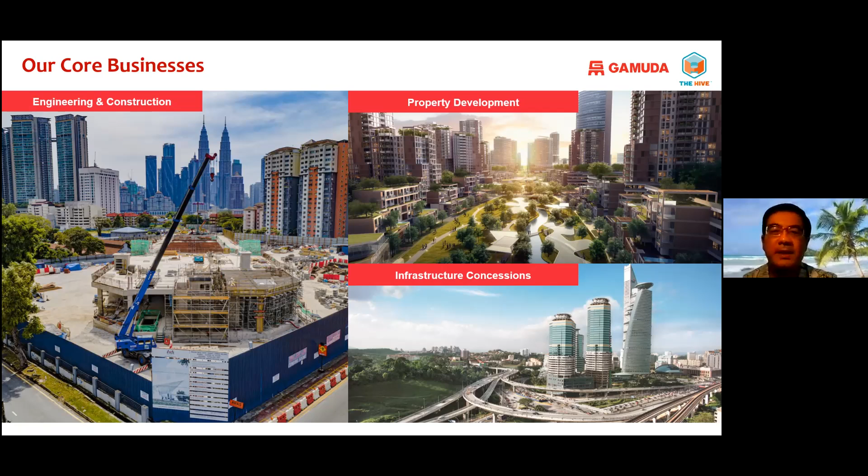Right, so this is how we all got started. If you're interested, I think Discovery Channel made a full feature-length documentary on this very piece of infrastructure. It's still the only one in the world. It's called the SMART Tunnel, S-M-A-R-T. What it stands for is Stormwater Management and Road Tunnel. So the acronym is SMART.

What it does is, Kuala Lumpur basically sits in a valley, and we have a tremendous amount of thunderstorms throughout the year, being an equatorial country. So we were very prone to flooding. In fact, the word Kuala Lumpur means muddy river bank in Malay, and those river banks would just burst, and the rainwater into the two rivers that make up Kuala Lumpur, or at least the heart of Kuala Lumpur, would overflow, and it'll be quite terrible actually. So Gamuda gave a solution, which is to build a tunnel, obviously, to take all that water out, millions of gallons of water.

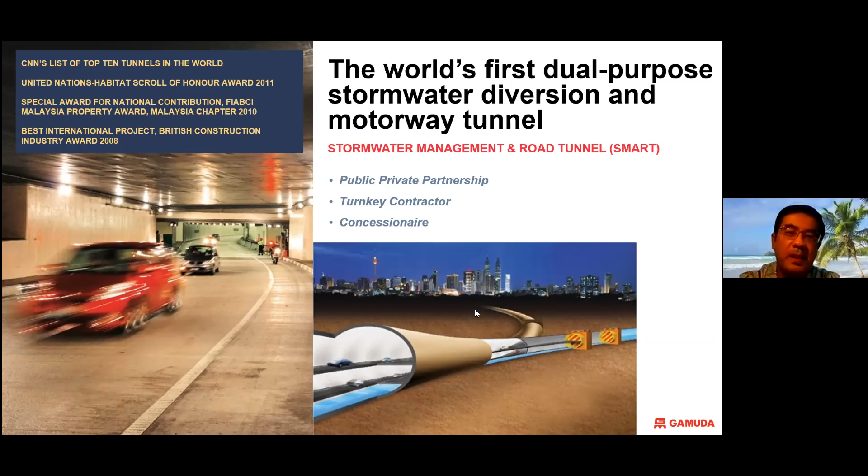It remains the one and only stormwater diversion tunnel in the world. If anywhere in the States has this problem, Ravi, let us know—obviously we can provide the solution.

So it has several modes. Mode 1 is when it's dry. Mode 4 is the worst thunderstorm, when the whole tunnel is taken up. Mode 2 is quite light, cars can still go through it. Mode 3 gets a bit heavier, so for safety reasons we shut the tunnel.

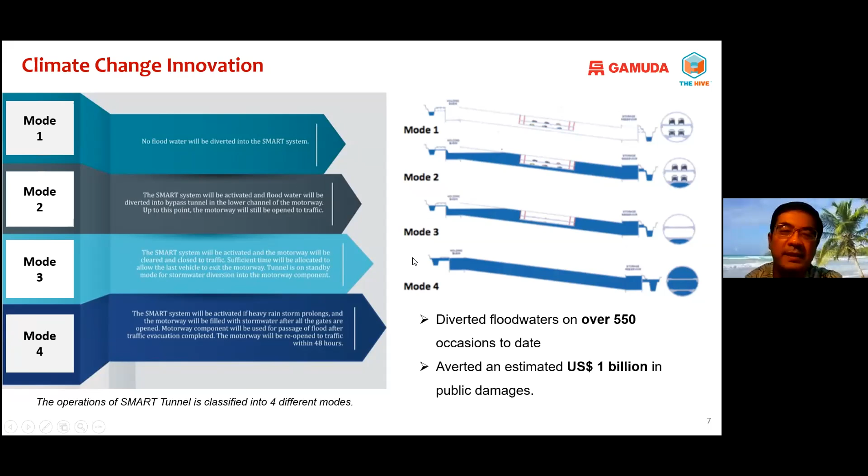Not a single car has been stuck in the water in the tunnel itself. They are pretty sophisticated systems to ensure that doesn't happen. So this is the operation of that tunnel.

As I mentioned earlier, we are looking at a job, and in fact we've already clinched it in Taiwan. Here we're building about just under 4 kilometers of a 43-kilometer public transport rail line, constructing two parallel underground tunnels and two underground stations as well. The key complication in Taiwan is the soil conditions as well as earthquakes, which is a key concern there.

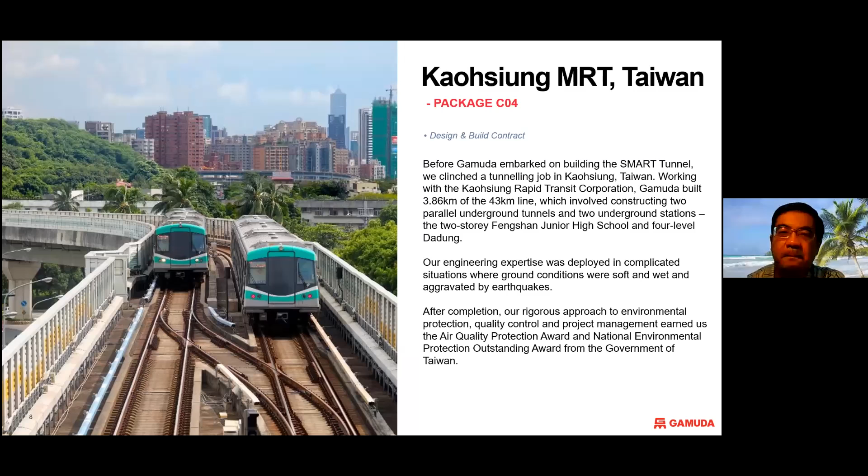With the success of our smart tunnel, we became tunneling experts. I wanted to say a thing or two about the geology of the Malaysia terrain. As I mentioned, Kuala Lumpur means the muddy riverbank, so the soil conditions in Malaysia are essentially quite soft.

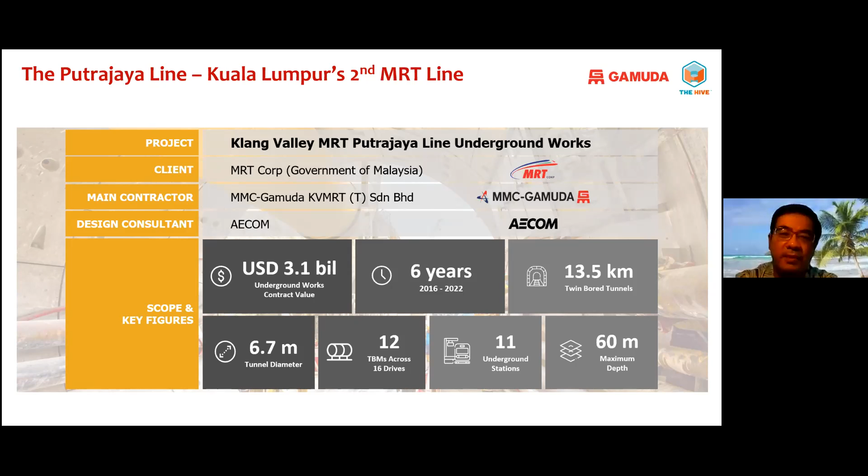It's called karstic limestone. If you tunnel within relatively soft ground, it becomes very dangerous because it affects other parts of the surrounding area, and you might create humongous sinkholes that swallow up whole highways or buildings. It is an exceptionally difficult thing to do, and until we came onto the scene, the tunneling industry generally thought that tunneling in a place like Kuala Lumpur would be impossible—which is why, even though other countries had underground metros many years ago, for us the geological conditions made it very dangerous until that time.

Having said that, we then put in the innovation of something called a variable density tunnel boring machine that can sense the surrounding ground area and do the tunneling in a very careful manner, all by itself, without creating sinkholes. The gentleman I'm going to have speak to you later was part of the brainchild of this whole project.

We then succeeded, and now we're building the second MRT, or mass rapid transit line. It is 13.5 kilometers of twin bore tunnels. The tunnel diameter is huge, just shy of 7 meters. We have 12 tunnel boring machines, all with the variable density technology I mentioned, and the tunneling depth is about 60 meters underground. The whole underground contract works is just over $3 billion.

This is going to be completed very soon. It says 2022 there, but we've essentially already completed our portion, and hopefully the first phase of the line will open very early next year.

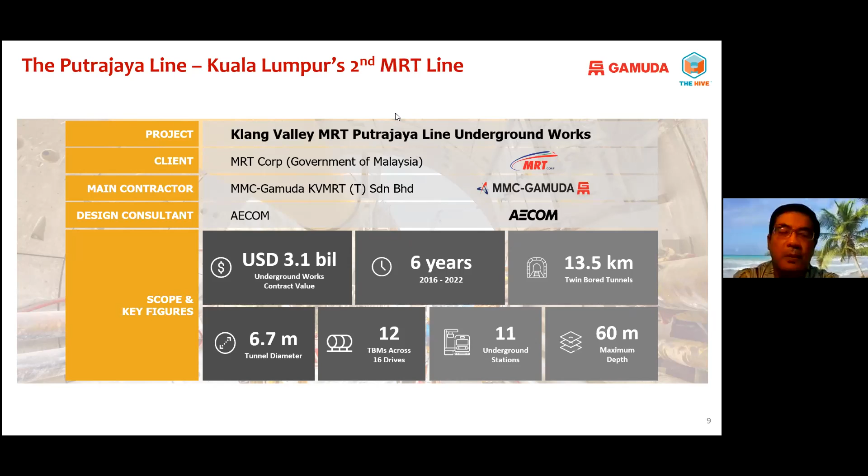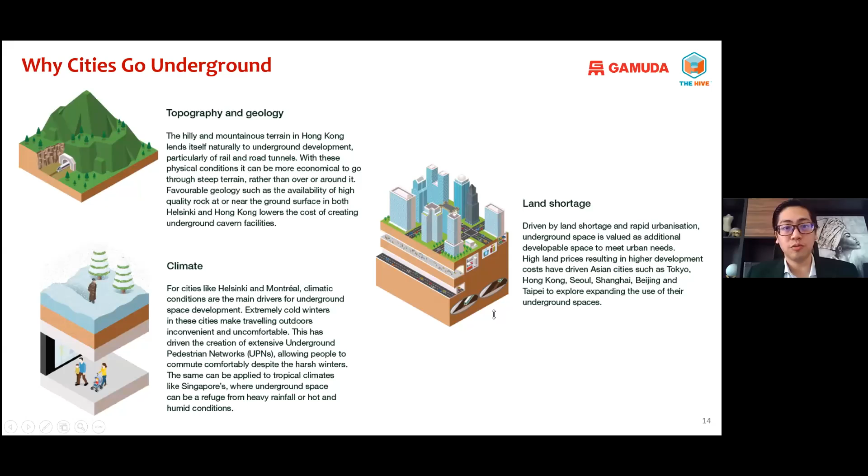So why do people go underground? Before I begin, I'd like to qualify that, strictly speaking, the term underground doesn't always mean beneath our feet. When I say underground, I could also be referring to a tunnel built through, say, a mountain at high elevations, because the technology and methods utilized are quite similar. So anything that has ground above it is considered underground.

One of the reasons cities go underground is topography and geology. For example, some cities like Hong Kong are built in very mountainous and hilly regions, and this lends itself naturally to underground development and a lot of tunneling. With such natural conditions, it's often more economical to go through the steep terrain rather than above it or around it. Also, if the rock and natural geology in the region is very hard and self-supporting, meaning if you dig a hole through the geology it stands by itself, underground construction can also be relatively cost-effective - and I say relatively, but I'll come to that later.

So you can create huge underground caverns, huge underground spaces, and use this space for a variety of things. People also go underground because of a shortage of space, particularly given rapid urbanization in many cities around the world. Underground space will become an increasingly valuable resource as space becomes scarcer, and more people move into cities for economic opportunities, or sometimes simply because they're driven there by the effects of climate change. Today, more than half the world's population lives in urban areas, and by mid-century it's estimated that it will be closer to 3 out of 4 people.

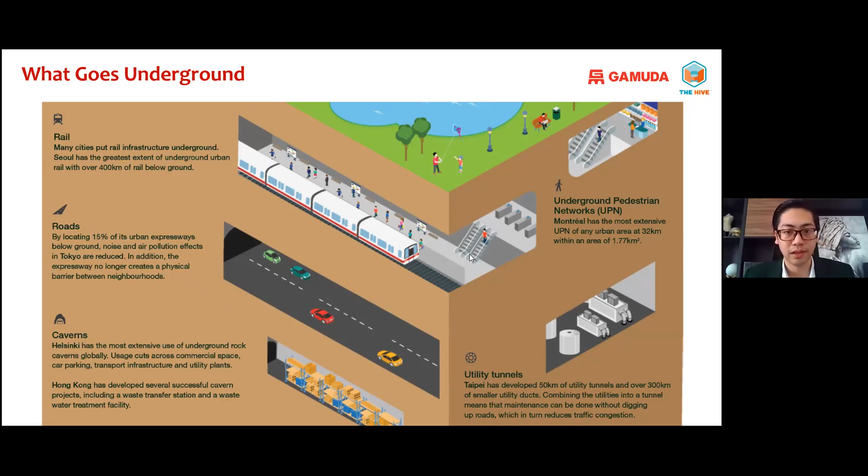Given that underground space will become an increasingly valuable resource in the coming years, the conscious planning and management of this resource will also become increasingly important.

In the past, it's always been on what I call a first come, first serve basis. So whatever you build today underground, let's say a tall building with deep foundations, someone else in the future will have to build around it or under it, even if they're building more complex infrastructure or something of significant, say, national importance like a rail line. So this is hardly optimal.

Many cities around the world have already started or are starting to regulate underground space with laws, regulations, and master plans. Many are also establishing digital databases of building foundation records, geological data, utility records, and so on for planning purposes. The private sector is also coming up with many innovative public-private partnership ideas to fund and develop underground spaces, when in the past it was almost purely the purview of national and state governments.

Okay, so on to maybe a brief history of tunneling.

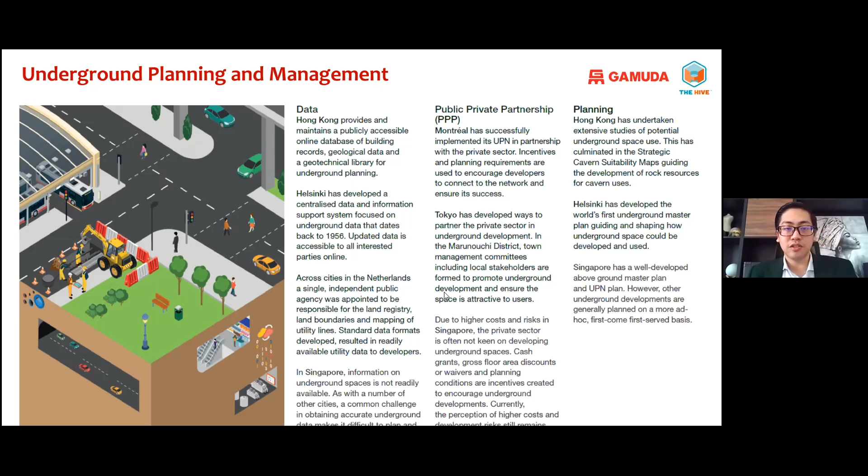From the time of the pharaohs in Egypt, tunnels have been historically built using what we call the cut and cover method. This is essentially digging up a long trench in the ground to the required depth, then you build the tunnel and cover it again with the previously excavated material. Thus the term cut and cover.

Sir Marc Isambard Brunel and his son Isambard Kingdom Brunel were able to excavate a tunnel under the Thames River in London in the early 1800s. The tunnel created an important connection between the north and south banks of the Thames that is still in use today, almost 170 years later.

Previous attempts at tunneling in soft soils full of groundwater had been extremely difficult and were not particularly successful, and most projects were eventually abandoned. The application of this new technology heralded what I would like to call a new era of tunneling.

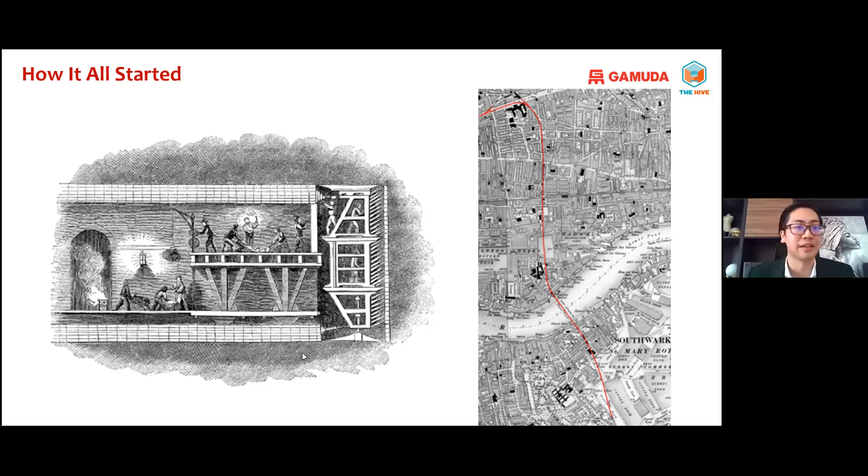The excavated face of soil or rock in front of the cutter head of these modern machines is now supported using pressurized air or fluid, which prevents collapse during excavation. And this allows for tunneling in a much wider range of geologies than was possible before.

Of course, there have also been other incremental improvements in tunnel boring machine technology over the years. Most tunnel boring machines today are electrically driven. They can go faster, deeper than ever before, and are more robust. But all in all, tunneling is still a slow, laborious, and high-risk process, and a lot more innovation needs to come into play if we're serious about expanding our underground space.

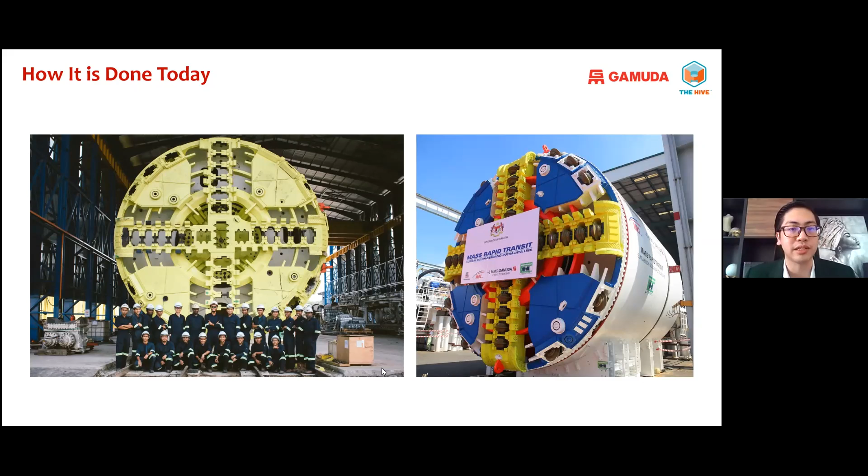Underground construction is very challenging technically. To give you a feel of this, when an engineer designs steel structures, because steel is a very homogeneous and predictable material that's well understood, an engineer would look at a safety factor of, say, 1.05 or 1.1. In the nuclear industry, safety factors are commonly in the range of 1.4, 1.5. But for underground engineering, factors of safety utilized sometimes go up to 3, and that's just how unpredictable tunneling can be.

Which of course brings about other challenges like the niche skill sets required and the very high cost of building underground. When you build anything away from the surface of the ground, like skyscrapers, costs go up the higher you build any structure. But when you go underground, your building costs go up significantly faster for every meter you go deeper. So if you look at public transportation systems, underground subways are always the most expensive per kilometer.

There's also a very special set of safety considerations like ventilation requirements, access and evacuation requirements, and other considerations like working in confined spaces, which also makes underground construction very expensive. There are also issues of complicated approvals, which I will touch on shortly. But all in all, improvements in underground technologies have enabled great strides in urban development in recent years, but the complexity and unpredictability still inherent in underground construction are indications that many challenges will remain in the coming years.

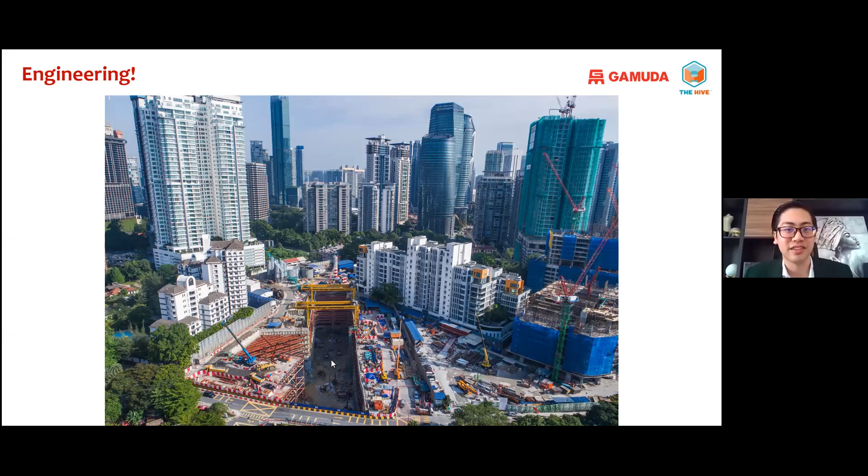So in tunneling, there are also a lot of niche skill sets required. For example, tunnel boring machine operators are in such high demand globally that typically before a TBM operator has completed a job, he or she will already have another one in place waiting. On the Putrajaya line, we had to look for 36 TBM operators at one go, and it was a complete nightmare, and that in effect also drove our initial inclinations to develop an autonomous TBM. But John will tell you a bit more about that story later.

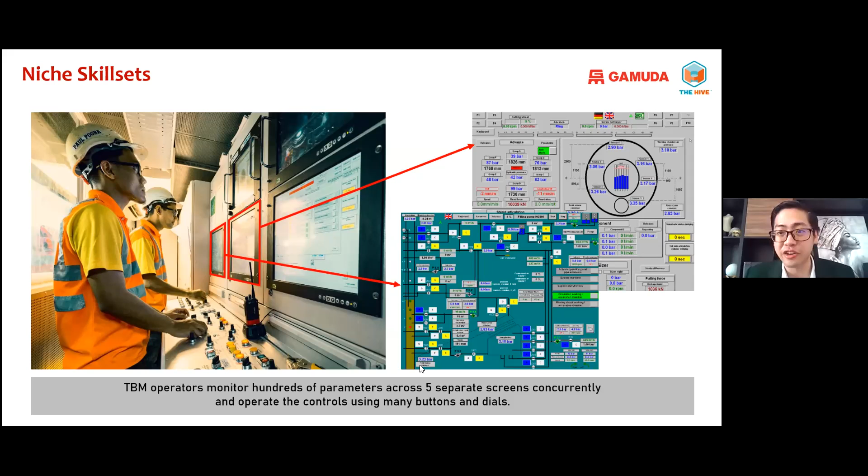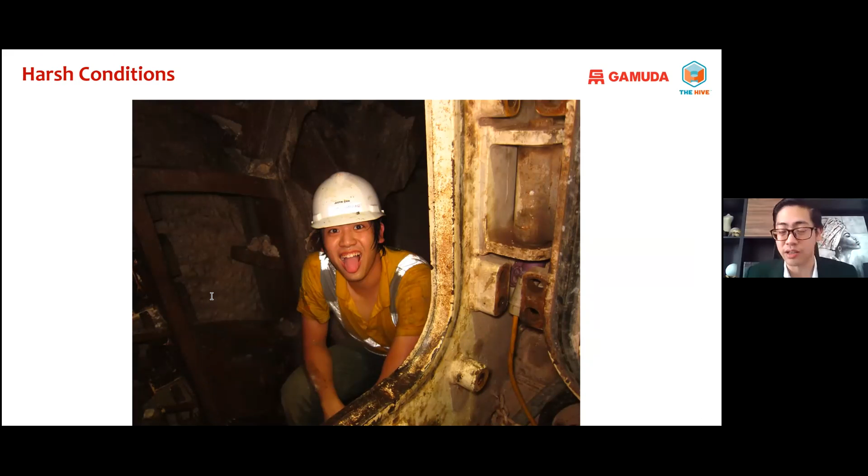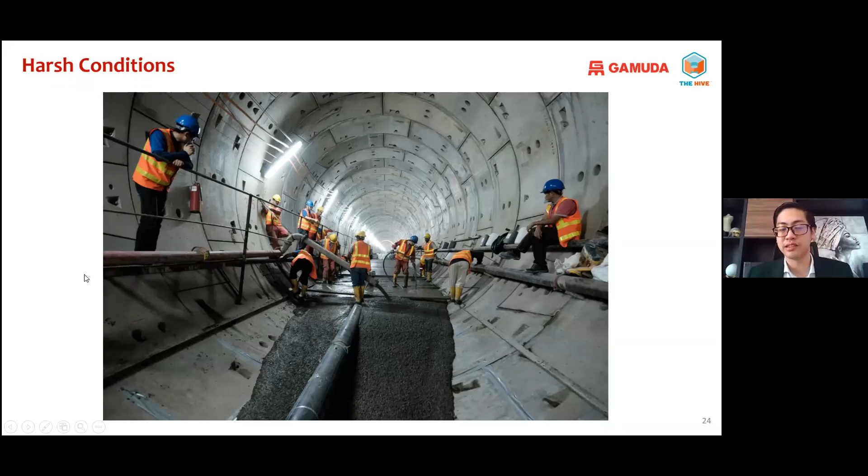This picture was taken at 3 bars of pressure, which is essentially akin to diving about 100 feet underwater, if any of you are deep sea divers. We also work in confined spaces where ventilation is limited, and it's very hot and humid, with temperatures that can go over 110 degrees Fahrenheit. So it's quite a harsh, uncomfortable place to work in.

I spoke earlier about increasing the regulation of underground space, but I'll briefly tell you what it's like in my home country, Malaysia. Underground space in Kuala Lumpur has historically been not particularly well regulated. There are no pre-planned tunneling corridors, and the existing data of utility and foundation records are often inaccurate and non-existent in some cases. You can imagine how difficult that makes underground construction.

Laws pertaining to underground space are also very different in different parts of the world. In some countries, if you own a piece of land, you only own the surface up to a few feet below the ground, including your basement. But in Malaysia, when you own a piece of land, you own it to the core of the earth, so you own all the underground space underneath your plot as well. This brings about issues concerning land acquisition when we're building public infrastructure, and makes things quite complicated and bureaucratic in general.

I mentioned earlier that Kuala Lumpur has no pre-planned tunneling corridors. So when we were building our metro lines, despite our best endeavors in selecting tunnel alignments to minimize land acquisition and impact to public and private stakeholders, we still had to demolish a few structures along the alignment. A lot of the structures also needed to be protected and strengthened, entailing installing new foundations, treating the ground, and removing old foundations—quite extensive work.

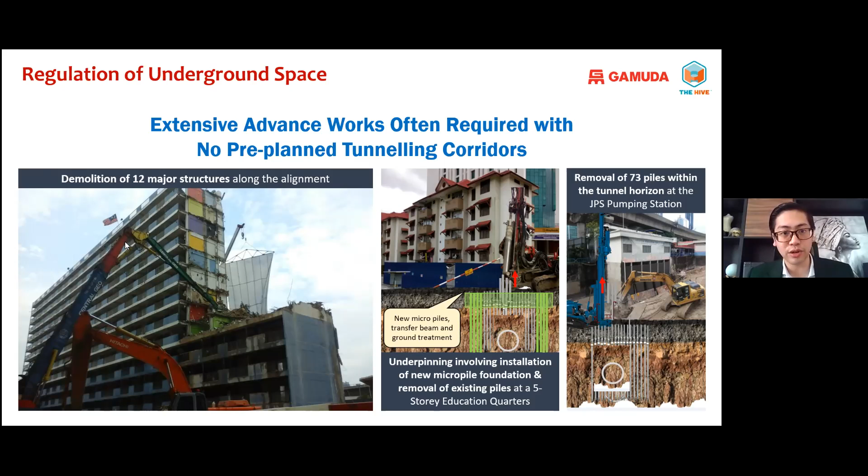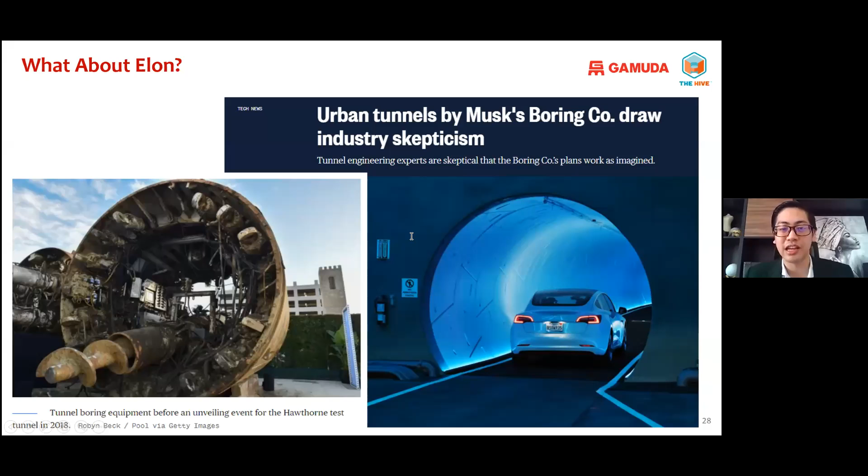For something a little closer to home for most of you, I'm a big fan of Elon Musk, who is famous for dabbling with electric vehicles, reusable rockets, and satellites that can beam down high-speed internet to the most remote regions of the planet. Really high-tech stuff. But in 2016, he set his sights on tunneling, with the idea to create a company that would solve traffic by building a system of underground tunnels. Elon founded the Boring Company in 2016.

He said that the problem with tunnels was that they take a long time to build and are very expensive, and that something needs to be done to revolutionize the tunneling industry—we would need to be able to build tunnels way faster for a lot less money. And he's absolutely right. Well, most construction professionals will tell you that usually it's not the speed of tunnel boring you need to worry about—it's the approvals, the environmental review, the bureaucratic procedures, the permits. That was a very painful and hard lesson that Elon had to learn, just like the rest of us.

So after about a year and a half of digging and construction, the Boring Company officially opened its first underground loop in Las Vegas to the public this year. But tunnel experts in the industry were quite skeptical if they will ever deliver their end game, their final promise. Remember in 2018, when Elon unveiled his tunnel boring machine to the public, a lot of tunnel experts saw the picture on the left and laughed it off, because they could see it was a very basic off-the-shelf tunnel boring machine, unlikely to deliver the promise of building tunnels way faster and for a lot less money.

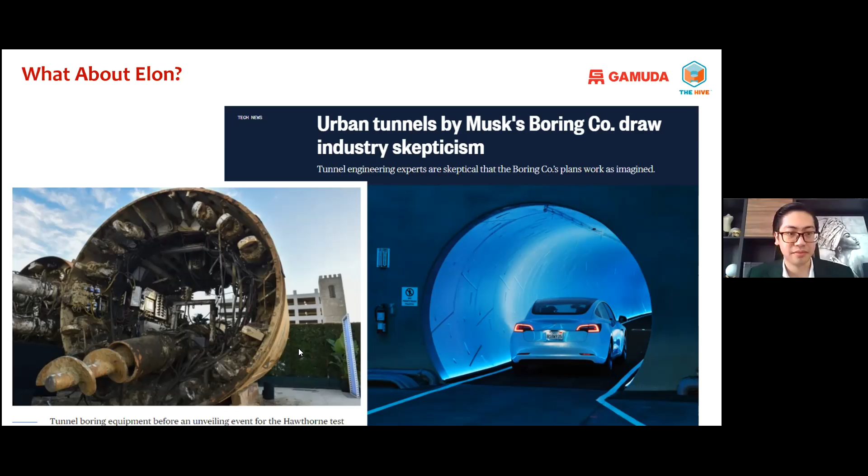All right, thanks so much, Justin. I really resonate a lot with what Justin said about the need for many companies to embrace innovation in this space, and we welcome this kind of ecosystem within the industry. I myself started my career with the MRT project, doing innovation and developing some of the things that Danny and Justin have alluded to, the autonomous TBM. I'm going to bring us through some thoughts about innovation in the industry and innovation in tunneling, and what is really needed in order to bring about greater use of underground space, and also create this ecosystem of software, tools, platforms that can really bring this about, which I think is really crucial, having that ecosystem. So if we move to the next slide.

In terms of innovations needed, there's plenty of spheres where innovation is required in this industry. First of all, looking at design and analysis for underground technologies - let me give some context first before I talk about the innovations needed. Construction is known to be one of the least digitized industries in the world. There was a report in 2017 by McKinsey talking about how the construction industry is very close to agriculture in terms of its adoption of technologies. And we are in a way trailblazing a path forward, and there are some areas that require this sort of innovation.

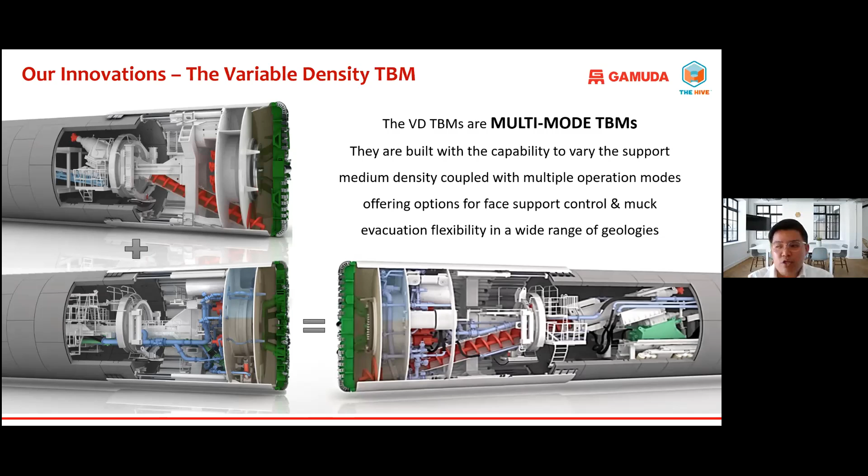We looked at earth pressure balance machines, which are very common, and also slurry machines which are in wide use. We innovatively combined the two to provide multi-mode capability, so that we're able to leverage different mediums or operating principles to tunnel through a wide variety of ground using a single machine.

This has really helped us on our projects here in Kuala Lumpur. Not only do we go through one type of ground, but multiple types - from karstic limestone to Kenny Hill formations, which are soft soils, and also hard granitic formations. We've gained economies of scale by not having to buy specific machines for specific stretches, but instead use one machine able to tunnel through all these different geologies at the same time. That's one innovation we're very proud of.

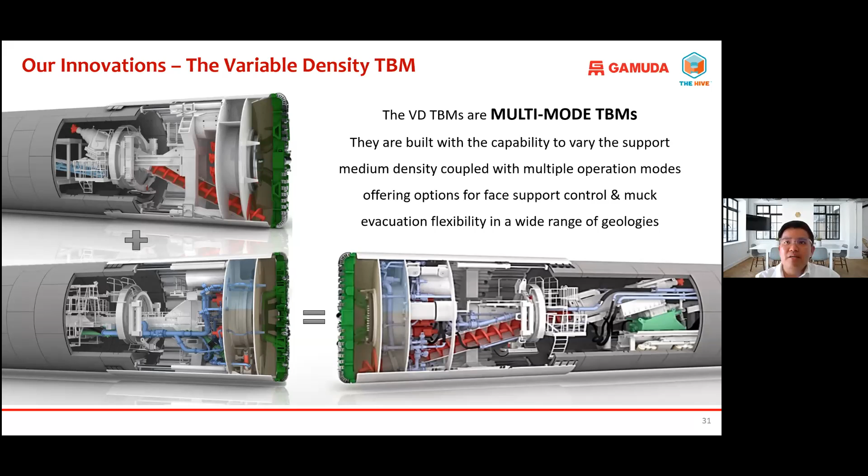It's one we innovated together with our TBM manufacturer, Herrenknecht. The next innovation is in the area of the autonomous tunnel boring machine. This is a project that myself and my team worked on with Justin, and it was recognized as the Technical Product Equipment Innovation of the Year in 2019 in Miami, as well as Innovation in Tunnel Excavation for the NCE Tunnel Festival in London.

The idea was that now that we're living in this digital age where we talk about AI and data, and how data can help us in all spheres of life, we started asking ourselves: could we use the data that's very abundant in these machines - sensor data and things like that - to help us drive a tunnel boring machine?

Of course there's always the question of how do we do this quicker than, say, autonomous cars? But if we look at tunnel boring machines, it's a much more constrained problem since we're digging very slowly underground in very confined conditions. We started looking at the available sensor data, being able to replace the operator by mimicking what the operator does while driving the machine to keep it on point, on target, and also mitigate disasters.

A lot of times, out of the pool of TBM operators we have, there are varying levels of experience and skill sets, and you don't get a consistent mix across the board. The autonomous tunnel boring machine gives us the advantage of consistency - an algorithm that does what it's programmed to do over and over again, in a very reliable manner, 24/7. This was really a tunneling game changer, and we were recognized for it.

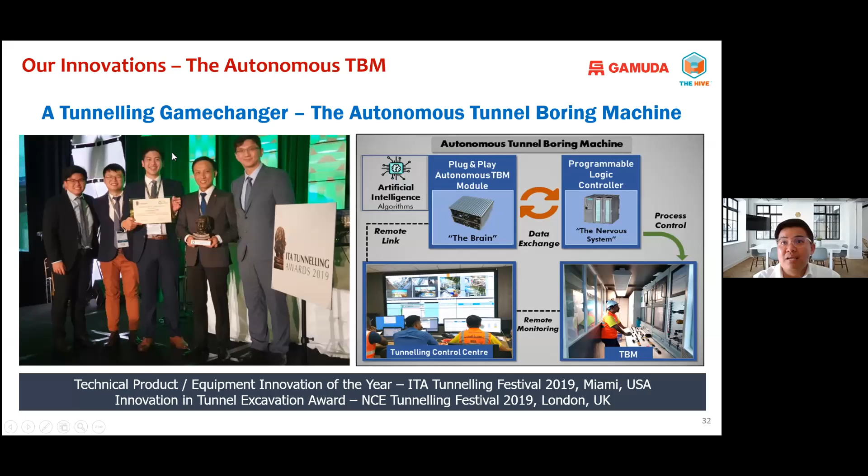We also combined that with our tunneling control center, where we host a lot of the data digital web portals that help us aggregate our sensor information, site information, and cameras, in order to gain a bird's eye view of what's happening on the tunneling site. If you move to the next slide.

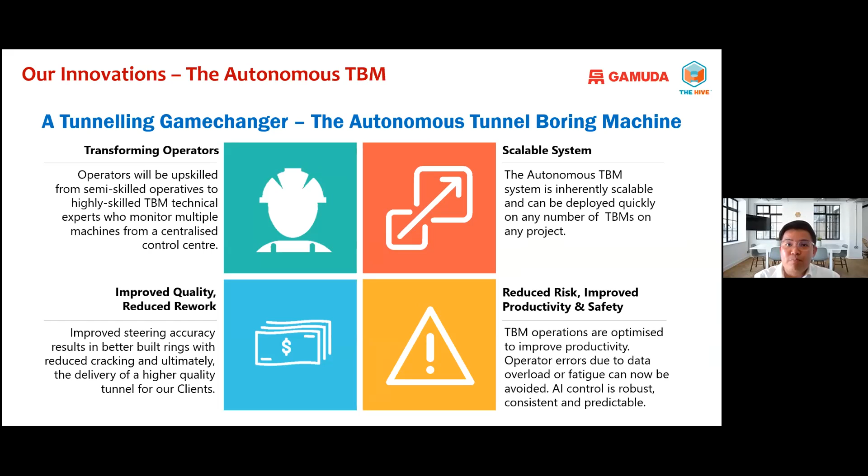As I said, it's a tunneling game changer because we're transforming operators from semi-skilled operatives to highly skilled TBM experts. We've improved the quality, reduced our rework. It's a scalable system where we're able to deploy this on as many machines as we need. We've reduced our risk, improved productivity, and also safety.

The other thing we're working on right now is looking at how the cloud plays a role in this. With all the data that we have, can we move it into the cloud and be able to visualize it and apply algorithms to extract information or insight. The result of that is a portal we've developed called Tunnel Insight. We utilize data from our sensors, analyze it in real time, and provide insight to users or to our shift crews.

A large problem most of the time is that shift crews come and go. Their shift ends and another crew comes on, and they don't have full visibility of what has happened in the previous shifts, or what trends have occurred. What we've done is look at trends over a long period of time, one week, two weeks, and be able to spot anomalies or patterns worthy of investigation.

So this has in a way helped us with our tunneling process. We're working on the next version as well, where we're trying to include information from building sensors, and sensors along the alignment, to tie that in with our TBM data, so we can have a very clear bird's eye view of the risks and mitigate them, nipping them in the bud very early on.

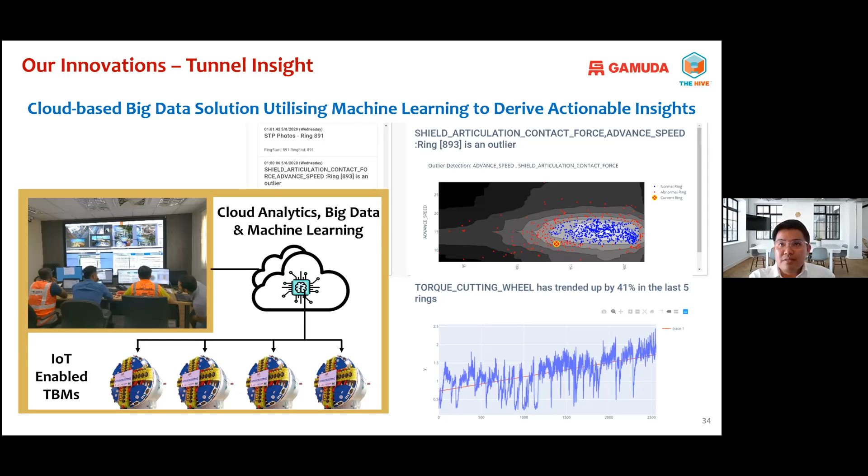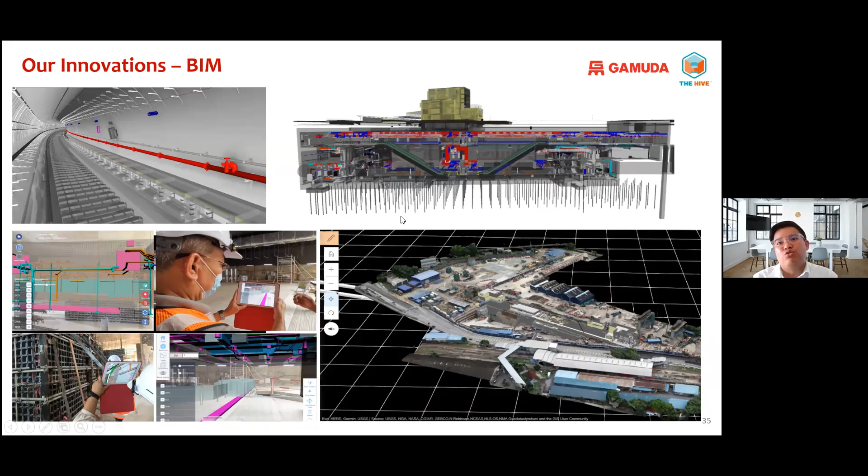Okay, perhaps we'll move on to the questions. I think we don't have too much time left. I see two questions in the Q&A box. Maybe John, you can take the first one from Sharil Ibrahim: does a human or operator need to do decompression to go from the tunnel boring to the ground, like diving?

Yes, correct. So what happens is that when there's an intervention, the machine stops, a person goes into a man-lock where he's pressurized to the pressure of the front face. When he's done with his work, he comes back into the man-lock and is depressurized back to atmospheric, then out through the man-lock again, back into the other side of the TBM. It's quite a complicated procedure, and there are also regulations on how you do your decompression.

There's another question from Kamesh. How does tunneling change city planning? Are cities being planned around tunnels? That's a very good question. I alluded to part of the answer earlier in the presentation.

Some very progressive, forward-thinking cities are actually doing full underground master planning. They're regulating and master planning the underground space. The idea is because the deeper you go, it's more expensive, so they will prioritize critical infrastructure and give it priority in the right of way. But in some other countries, they're still adopting a first-come-first-serve approach, which is hardly optimal, because a simple foundation of a building can actually increase the cost of a critical rail tunnel by many hundreds of millions of dollars, and that's quite unnecessary if it was planned with foresight. So we hope governments of the future are more conscious about how they plan their cities and their underground space.